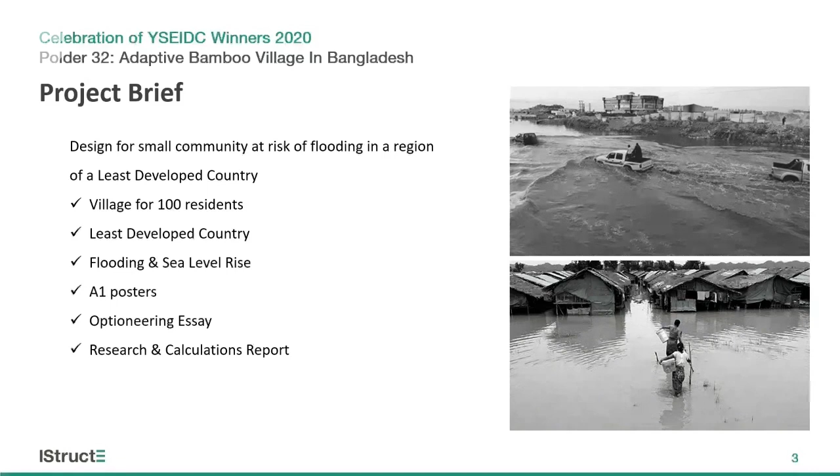When we were researching for a suitable country, we looked at the list of the 46 LDCs currently in the world, and we shortlisted countries based on the areas that had low-lying coastal regions.

After doing some research, we discovered that Bangladesh had challenges not just from a flooding perspective, but also from an urban development perspective. The country has a rapidly growing population and significant challenges with regards to urbanization, unplanned city development, and the prevalence of informal settlements in these cities.

Bangladesh also has significant geographical challenges. The country is currently located at the confluence of 3 large river systems, the Ganges River, the Brahmaputra River, and the Meghna River. It's essentially a large river delta that is subject to seasonal and frequent flooding.

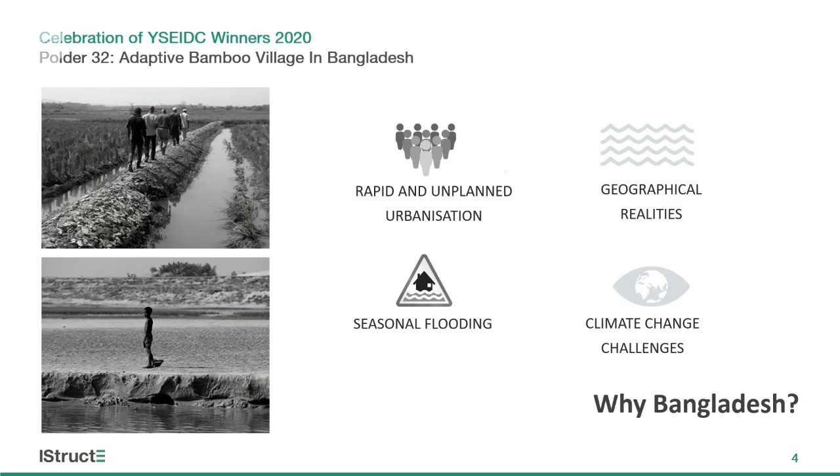Coupling these pressures with climate change, it's predicted that by the end of the century, a 1.5 meter rise in sea levels will result in 17% of the country being underwater, which would displace about 50 million people in the country. With this research in mind, we felt that Bangladesh would be a suitable place to base the project on. Delving a bit deeper, we tried to find a suitable site.

To do this, we looked into some case studies, and we stumbled upon the case study of Polder 32 in the southwest region of the country. This area adopted the Dutch polder and dike system, which has been used in Bangladesh since the 1960s. The system is basically an embankment system that protects the land against flooding.

This hard engineering solution was successful in the Netherlands, but as evident in Polder 32 and around Bangladesh, foreign consultants failed to consider the impacts of sediment. The rivers of Bangladesh, unlike the rivers of Europe, actually carry 1.2 billion tons of sediment per year, and this causes a large amount of silt to build up on the riverbed. In the end, this poldering solution was actually a failure, and it increased the flood level.

So learning from Polder 32, many people in Bangladesh are going back to traditional techniques whereby they allow the land to naturally flood. And this is something that we wanted to incorporate into our design.

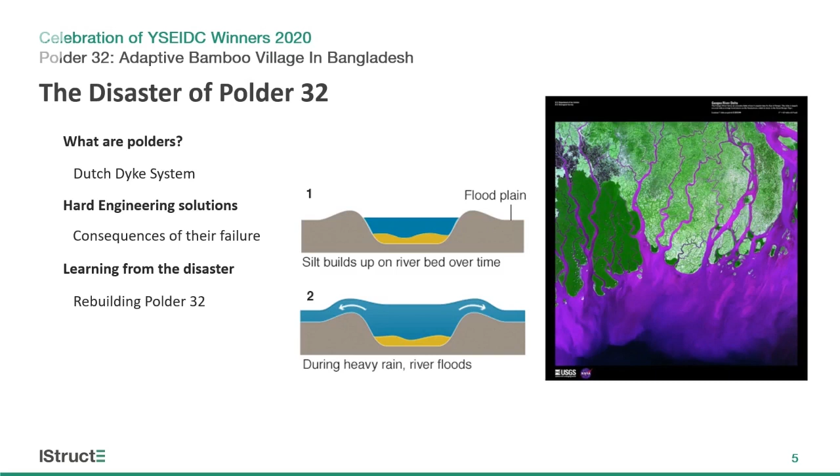So as Gian mentioned, we focused in the area of Polder 32. This community was significantly impacted by Cyclone Aila in 2009, mainly due to the 4-meter embankments of the Polder system failing, leaving the community completely submerged by waves, with further long-term impacts due to the buildup of stagnant water, due also to the absence of any mechanical pumps.

This southwest region is said to already be sinking at rates of 9 millimeters per year, making it very vulnerable to seawater flooding, with additional factors such as erosion causing the area to sink 1 meter over the course of just 5 years. All of these factors have resulted in the displacement of these communities, with many having to...

relocate to other polders or even informal settlements in the city. Therefore, throughout our design, we had to think about how we could retain these communities in these rural areas to prevent further pressures on cities and also to mitigate disputes between communities.

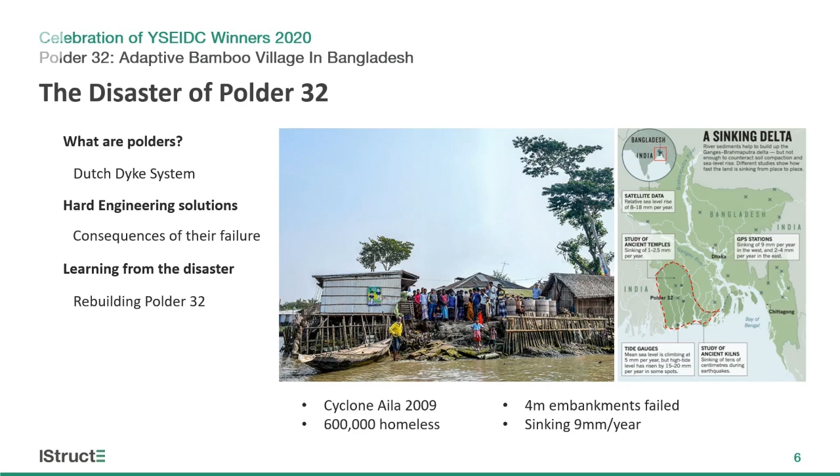So then, taking these into consideration, we developed our design philosophy to focus on people, progress, and the planet. This was really about ensuring that the needs and wants of the people in the community were met. We wanted to encourage progress of the community through building on their existing traditional skills and knowledge, as well as designing for long-term sustainability.

So thinking of all these different concepts, we developed a criteria that focused on cost, materiality, resilience, buildability, and acceptability. Briefly expanding on each of these: for cost, we focused on methods of reducing cost of construction, maintenance, and making comparisons to traditional alternatives.

In terms of materiality, we wanted to really understand the vernacular architecture and historical methods to gain insight into the locally available materials, to not only mitigate transportation emissions, but also to promote local businesses and self-recovery.

In terms of resilience, we wanted the design to efficiently adapt and respond to changing conditions while still maintaining functionality, even at predicted levels of flooding.

Buildability: we looked into focusing on modularity at various macro to micro scale, which allows for ease of expansion. In terms of acceptability, it was important for us that the design would complement the culture, tradition, and livelihood of the people.

In option 2, we looked at a shipping container community. These homes would be at ground level and adapt to flood levels using the plastic float platform stored below ground. It's quite interesting because during our research, we learnt that there was a massive shipyard located south of the country in...

Chittagong. So this design was not only to provide homes for the community, but it would also give us the opportunity to possibly upcycle these shipping containers that were nearby.

But again, this option, similar to option 1, wasn't really complementing the traditional architecture. It would make self-recovery very difficult, and there was very limited guarantee that the shipping containers would be of required quality.

that the livelihood and functionality of the community would not be compromised. We wanted to highlight the use of local materials here, local architecture, so that the residents would actually want to live there.

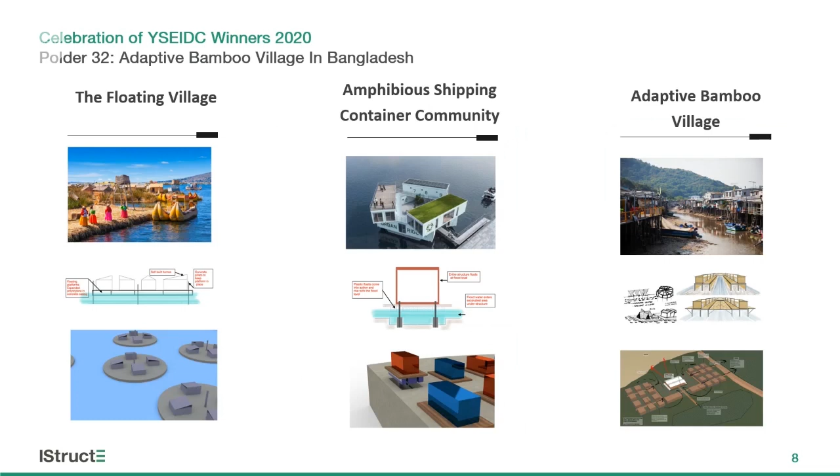So talking more about this, we started looking at the local vernacular architecture that influenced these rural areas. We found that the architecture actually varied from division to division and was heavily influenced not only by the local materials available, but also cultural differences and local hazards that they were exposed to.

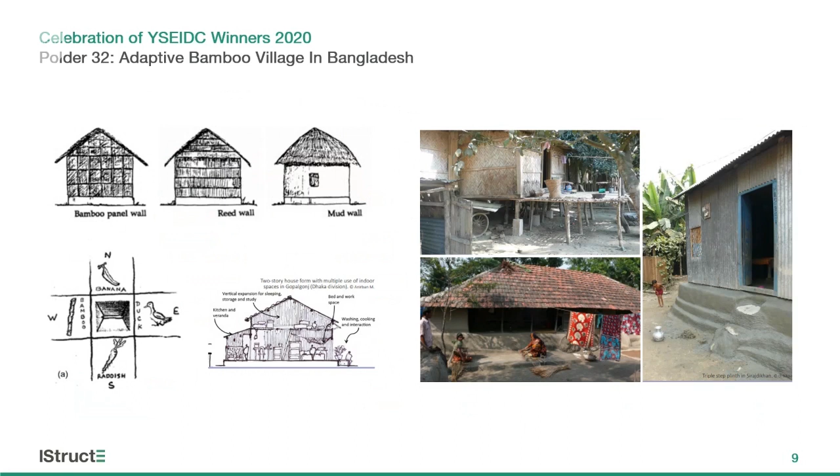So looking at each option, we started to map out where each of the materials would be coming from to get a better idea of the carbon associated, mainly to do with transportation. It was really helpful for us to visualize clearly the impact each would have. For example, even though we wanted to upcycle shipping containers from Chittagong, other required aspects of option 2, such as the plastic floats, would have to be shipped all the way from China. So beyond the carbon aspect, it would also make it really difficult for the community to expand on its own. This was a very important exercise for us to go through in our design.

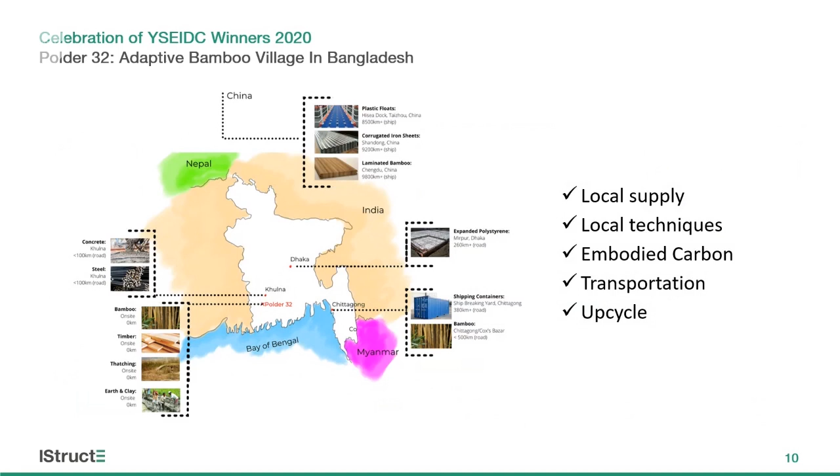Another major influence was our own personal experience and knowledge. Gian and I started a research group called Bamboo for Better in our final year at university, and through it we got the opportunity to really explore the bamboo industry and design in the Philippines. So we wanted to take our understanding of the material and adapt it to suit Bangladesh, as it's a material that is quite widely available in the country.

Building on this research, here's a brief overview of why bamboo is such a good material. Firstly, it's a bio-based and highly renewable material, one of the most fast-growing plants in the world. It has a very low embodied carbon of only 0.87 kilograms of CO2 per meter length, and this is if you disregard the carbon sequestered, which would decrease this number further. It also has a very high strength to weight ratio due to its hollow cylindrical form, making it suitable for long span structures.

The material is very cost effective and locally available in Bangladesh, with 7 species of bamboo currently suitable for construction growing there. The bamboo plant itself also has numerous ecological benefits, and bamboo forests can act as a natural way to reduce erosion, stabilize soil, and stabilize the water cycle. However, it's still a very underutilized resource, as many people perceive the material as a poor man's timber, despite many vernacular techniques being developed over the years in Bangladesh and around the world.

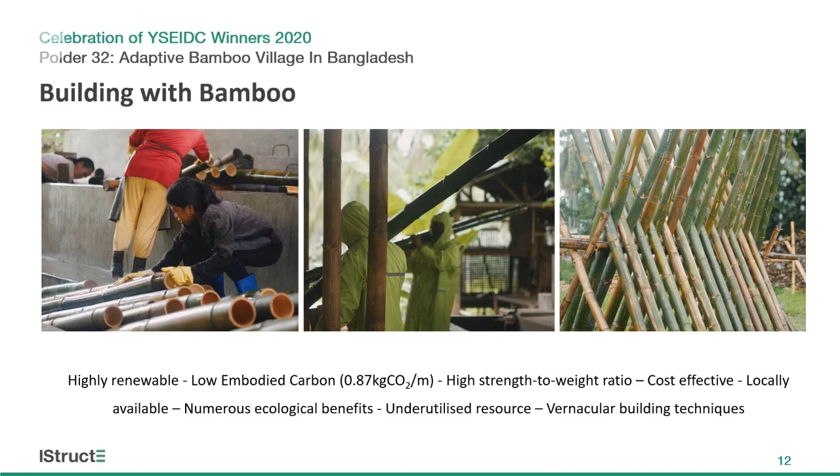So for this project, we decided to try and change this and to create a village and a new industry centered around bamboo and agriculture. We came up with this village layout, which is designed around agriculture.

The village is split into several zones. On the right is farmland, which will be raised above the flood level using earth embankments. These embankments will be stabilized by a bamboo forest, designed so it will be regularly harvested and used by the villagers to grow the village. The farms will comprise a variety of different food crops and focus on a more regenerative model of agriculture, ensuring the soil stays nutrient rich, so many different crops can be grown throughout the year, providing a sustainable supply of agricultural produce.

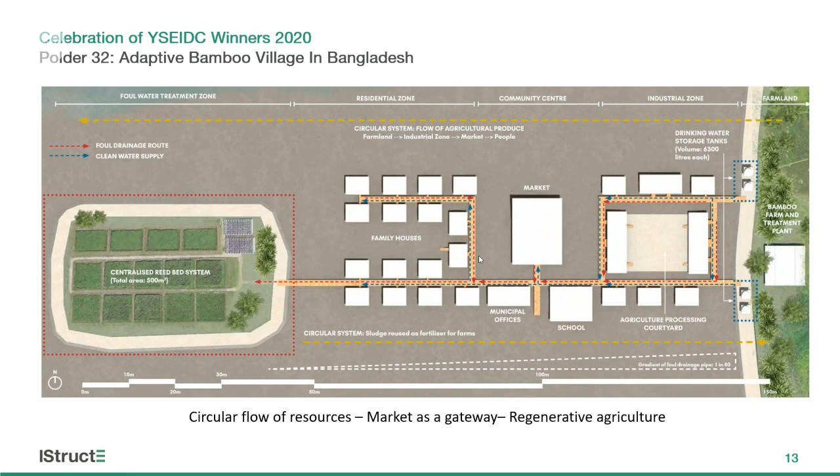Then you have the industrial zone where these crops will be processed, and in the middle you have the market and the community center where all the agricultural produce will be sold. Finally, you've got a residential zone and the foul water treatment zone, which will also be raised on embankments. Tying all these zones together will be elevated walkways, which will be the main access route for the villagers, both during the dry and the wet season.

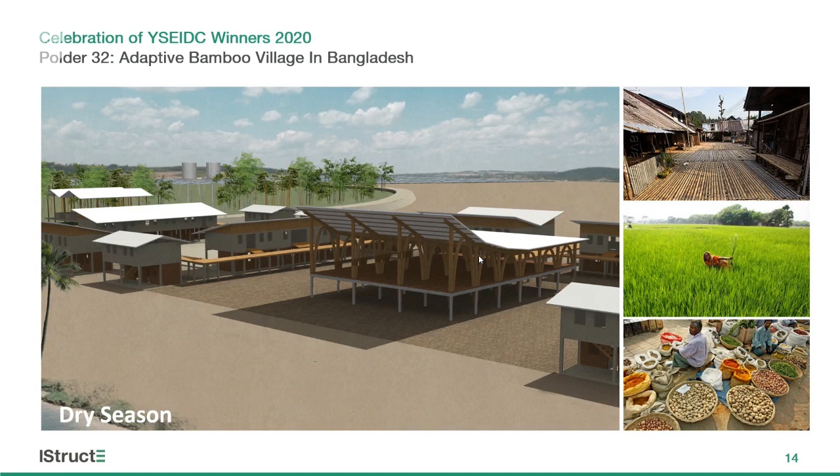During the dry season, the village acts as a typical Bangladeshi village, with the market as the focal point in the middle of the village square. Many activities can take place around and through it. People can walk around at ground level but can still utilize the elevated walkways as access routes. Each individual house is centered around communal courtyards, so that residents can interact with one another.

And as our name suggests, the design is focused on ensuring that the village would be able to adapt during the wet season and still enable the community to function as normal.

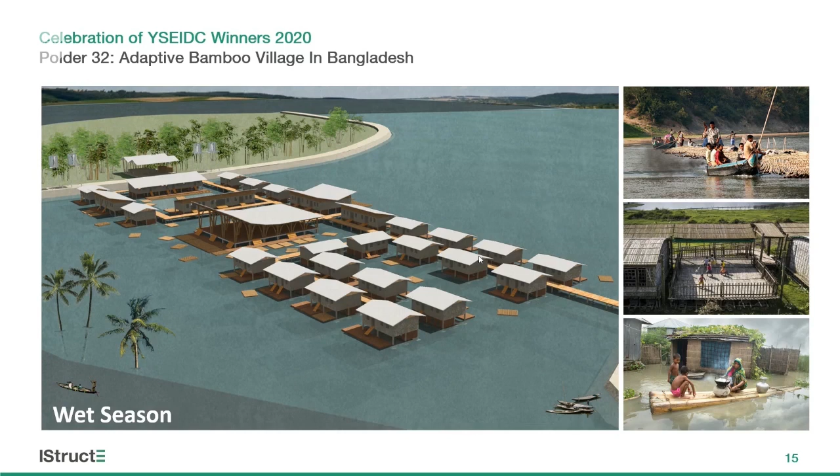As Gian mentioned previously, the locals in the past have allowed the land to flood during wet season. Taking this, we've designed the ground floor to be able to flood for up to levels of 2 meters above ground level. This is possible through the use of our adaptive wall-to-raft system, as well as the elevated walkway, which will allow people and goods to move through it no matter what season it is.

Talking more about the individual buildings and the structural design, we wanted to make the buildings as cost effective as possible. To do this, we opted for a modular, adaptable and prefabricated solution. As we're allowing the ground floor to flood, we had to create a 2-story building to avoid the floodwaters. And as bamboo will actually rot when exposed to water for a long period of time, we had to make the structural grid a reinforced concrete construction.

So we've got this 3x4 meter structural frame that will support a mainly bamboo first floor structure. To protect the bamboo against elements and to provide longevity and disaster resilience, we opted for this Bahareque system of shear walls, which is similar to a wattle and daub system. It's just a thin layer of mortar that will protect the bamboo and allow for composite action. This is something we actually discovered in the Philippines, and it provides significant disaster resilience.

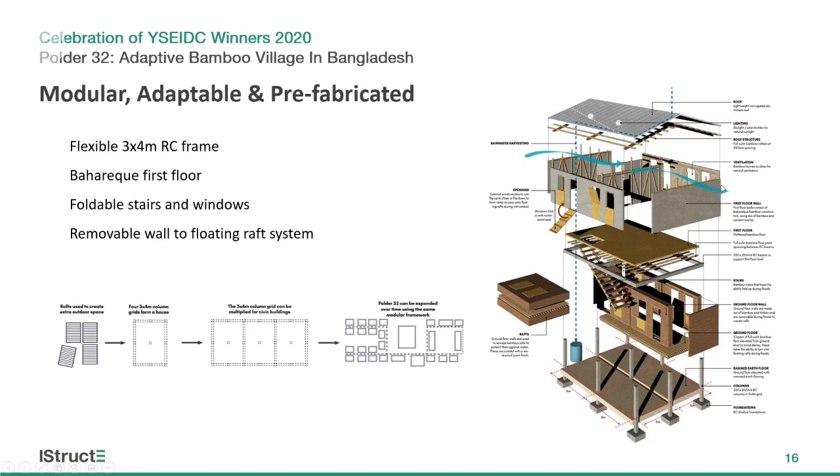The innovation in this design is actually for the wet season. We have foldable stairs and foldable windows, and also this removable wall-to-floating-raft system that we'll touch upon later. Finally, you've also got these bamboo louvres to allow for improved air circulation, and rainwater harvesting will be utilized wherever possible.

A family house during the dry season will look like this. You can see that the ground floor space will comprise mainly of flexible living and storage space, and there will be a semi-outdoor terrace with a rammed earth floor. The bedroom, the living area, the bathroom and the kitchen will all be located on the first floor level, and this is designed to avoid the floodwaters.

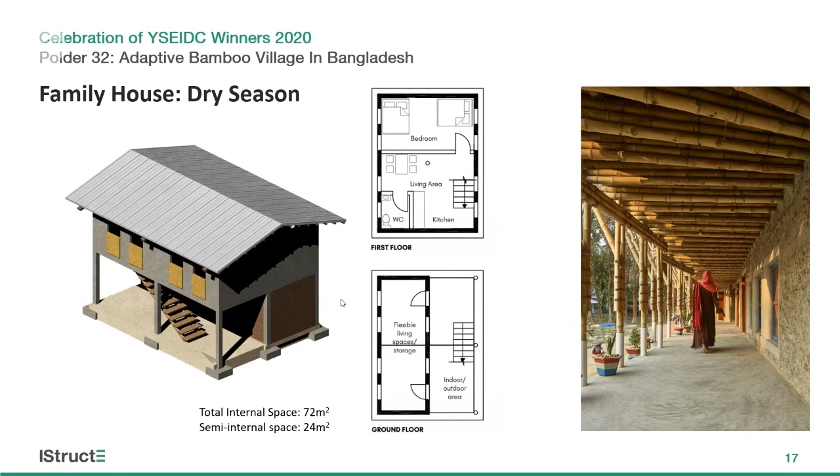And then you have this modular 3x4 grid, which is very simple, and it means that residents can expand their houses and adapt the spaces according to their needs.

When it floods, the house is designed to completely transform and adapt. The ground floor walls can turn into floating rafts, and the stairs can fold up into themselves to avoid the floodwaters. So although the ground floor space is lost, this is regained by the floating rafts and provides a stable platform for the residents to use.

So as you can see, although you lose your ground floor, you still retain your main living space, and you regain back some of the outdoor space through this floating raft system.

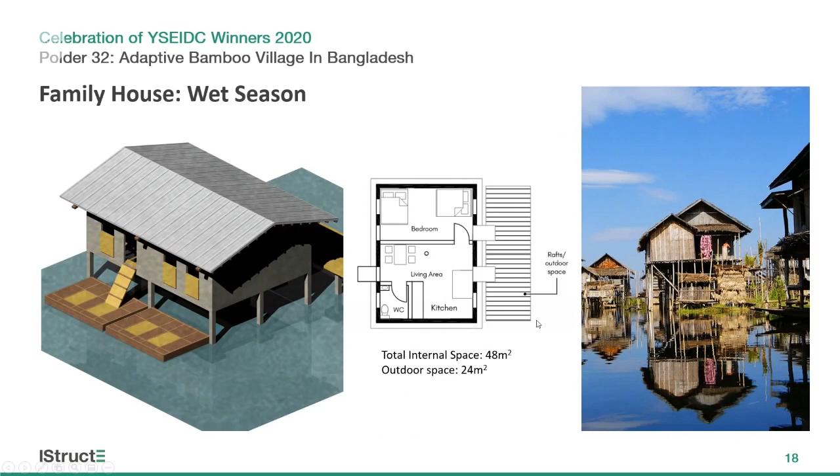And then the marketplace is a similar story. The market structure will comprise of a 4x6 meter RC frame, and that will support a lightweight bamboo structure for the roof. This structure will comprise of catenary bamboo arches, and this will not only showcase bamboo engineering, but it's intentionally open so that it will welcome visitors to the village, with the market acting as a gateway to the community.

During the dry season, the market will be at ground floor level and will sprawl across the surrounding courtyard, similar to how markets are in places around the world. And the first floor level will act as a multi-purpose space where villagers can gather for functions and events.

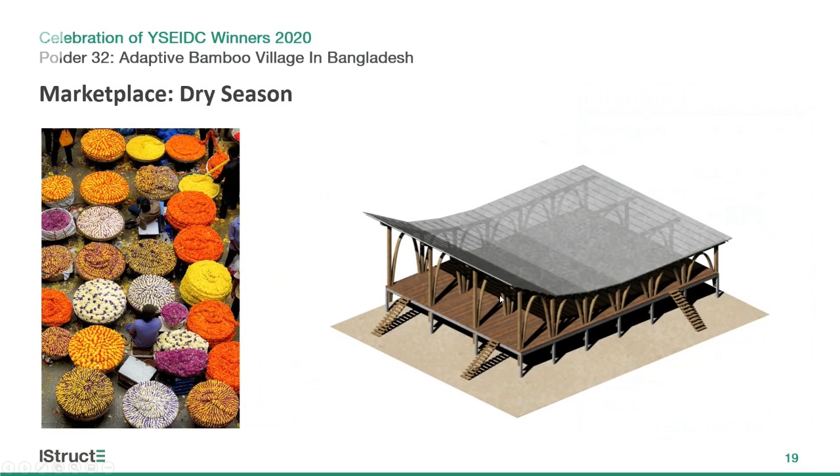Then during the wet season, the market continues to retain its function and be the focal point of the village. As the ground floor is allowed to flood, the market moves onto the first floor level, and similar to how the walls of the houses turned into bamboo rafts, these modular internal market wall partitions can be transformed to form this floating platform around the existing structure.

This floating market solution was inspired by the floating markets of the Mekong River in Vietnam. The idea is basically for each floating bamboo raft to be its own market stall where the vendors can sell their goods.

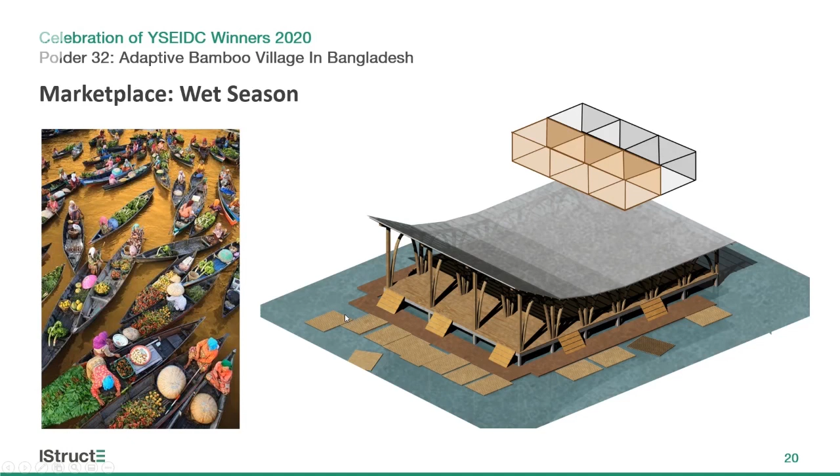And then the last typology in this village is farm and civic buildings. These are basically larger versions of the houses, and they too follow a 3x4 structural grid.

The intention is for the farmers to live on the first floor, and they process their goods in this large round earth courtyard in the middle. As shown in the image in the top right, these buildings will be conveniently located next to the farms so that the farmers have easy access to their crops.

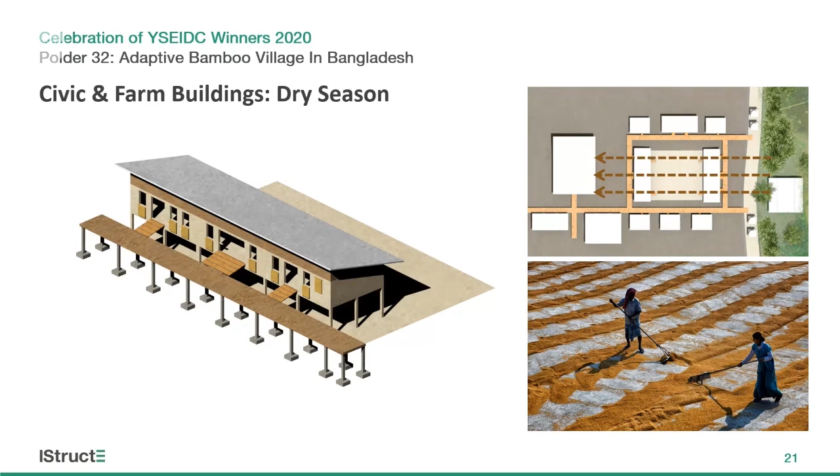During the wet season, the farm buildings continue to function as normal, and the bamboo rafts can again be utilized to form large interlocking floating structures. These can be used as a stable platform to process goods and agriculture as is normally done. These rafts can also be used to create floating gardens, which are prevalent all over Bangladesh.

This is something we just discovered with our research. So as you can see, the floating raft system is very adaptable and can provide solutions for all different typologies in this village, from creating terraces for the houses to providing extra space for the market, and then finally being utilized as floating farms.

I think the success of this design is not due to fancy new materials or significant innovation, but instead we try to show that we can learn and adapt traditional and local designs that local people already use as a solution for more modern problems like climate change.

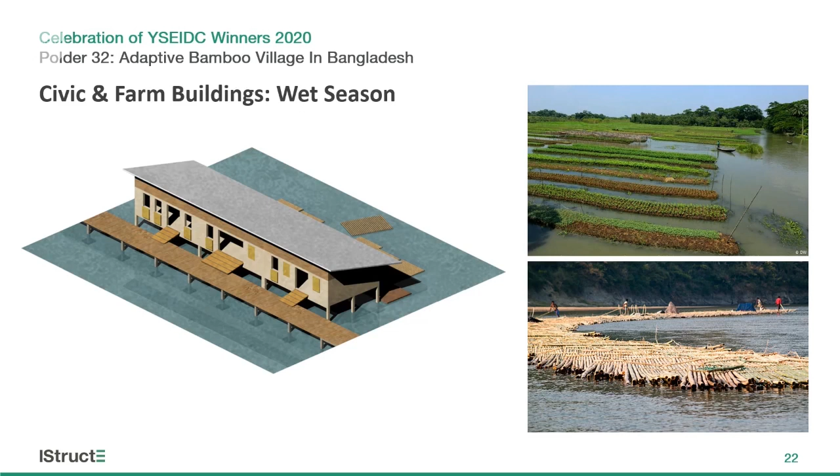Looking beyond the buildings, for our foul drainage system we decided to go with a centralized reed bed system, which we felt was a more sustainable solution to treat the foul drainage as opposed to a conventional decentralized system. Being a more natural method, it can remove up to 60 to 80% of solids, which makes it efficient and also reduces the risk of odor.

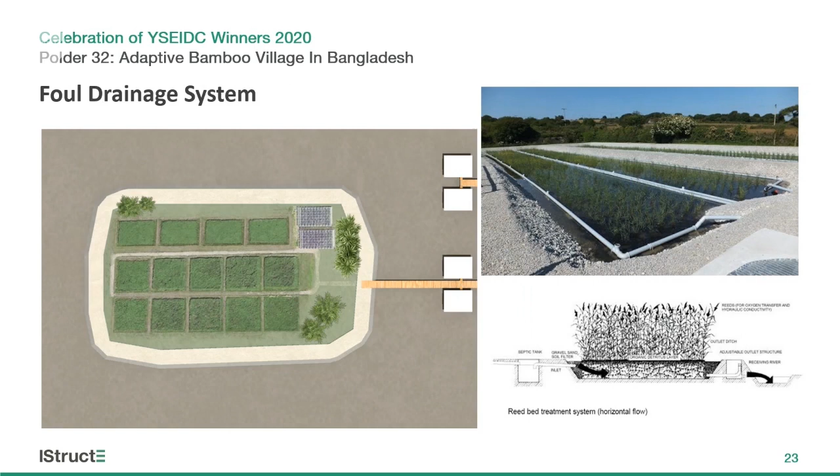This solution also eliminated the need for any excavation works, which helped in terms of cost estimations, and the sludge produced at the end of the process can be reused for farmland, completing this circular flow of our master plan.

So revisiting what we mentioned at the beginning, we always wanted this to be a community-centered proposal, using local materials and building on existing skills and knowledge. The simplicity of our design enables ease of expansion according to the needs of the people. Through training and the idea of self-recovery, we really wanted to give the residents complete ownership of the design, which results in the empowerment of the community.

In terms of the rollout for the proposal, we decided to have six specific phases. Initially, we want to start growing the bamboo on the existing polder. This is not only to establish a form of income, but also because bamboo requires at least three years to mature enough to be used structurally.

Next, we would start building some of the core embankments and the reed bed system. In phase 3, the required farming and treatment facilities and marketplace will be built, so that at this point the bamboo can start to be treated and produce can really start to be sold. At this stage as well, training of the locals on building techniques will start, which is also a form of reassurance to encourage residents that the project is long-term.

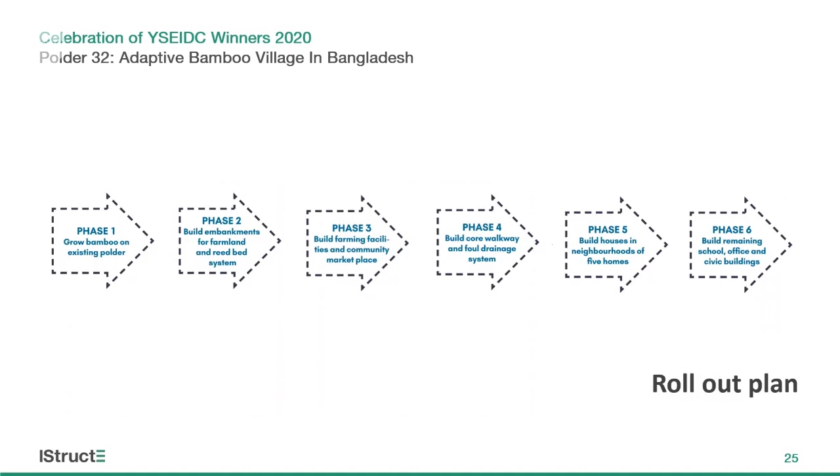Following this, the raised walkways are to be built so that in the event of flooding during this period, the bamboo farming and treatment will not be significantly impacted. Then gradually the houses will be built in neighborhoods of five, with phase 6 completing the plan with all remaining schools, offices, and civic buildings being built.

As suggested with the costs, we wanted to ensure that our design would be cheaper than traditional alternatives, and comparing it to the traditional pucka houses, we found that our design was cheaper.

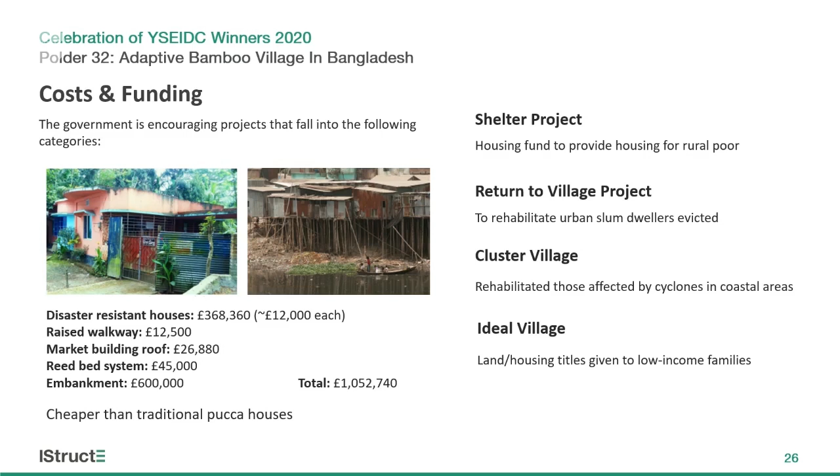We also wanted to make sure that beyond funding, our design was really in line with what Bangladesh wants. Looking into government initiatives, we found that the government has really been trying to encourage projects that fall into certain categories, with our project ultimately falling in the shelter project category. This would not only help us in terms of funding, but also give us the freedom to possibly replicate the design in other similar polder communities.

So yeah, I think that's everything. We hope we've given you a good insight into our proposal. We really enjoyed putting all of this together, and we'd just like to say a huge thank you to the IStructE for not only putting on this event, but the entire competition. For those considering getting involved in the next couple of years, we highly recommend it. So yeah, that's everything, I think.

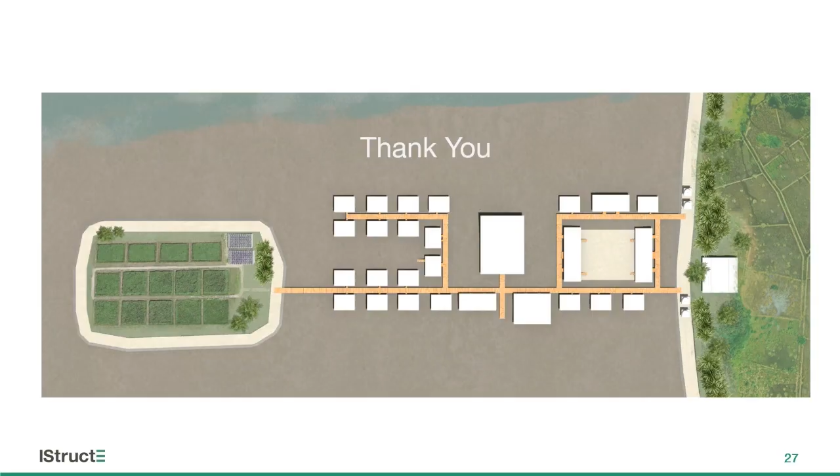Thank you very much, and thank you for that presentation. It was a really good presentation, really clear and really good to see.

I just wanted to say, I'm one of the judges. I have a background as a structural engineer, but also a background in emergency shelter and low-cost housing, which is why I was on the panel for this. It was a really interesting opportunity to be a judge and look at all the proposals and entries that came in.

This one for me stood out as the winner because it really got to grips with this as a process, not just an isolated technical solution. Reading through the entry was a real pleasure, because it felt like this was something really for people and for a community, rather than something for the benefit and interest of the designer, which is a real risk in designing projects like this, both in hypothetical situations like a competition and in reality, where the designer's desires and wishes get imposed on a local community. There was real consideration of circular and regenerative economy.

It really made it stand out. One of the tests I apply when looking at projects for low-cost housing for vulnerable communities is: is it something I could envisage wanting to live in myself? And this one really passed that with flying colours.